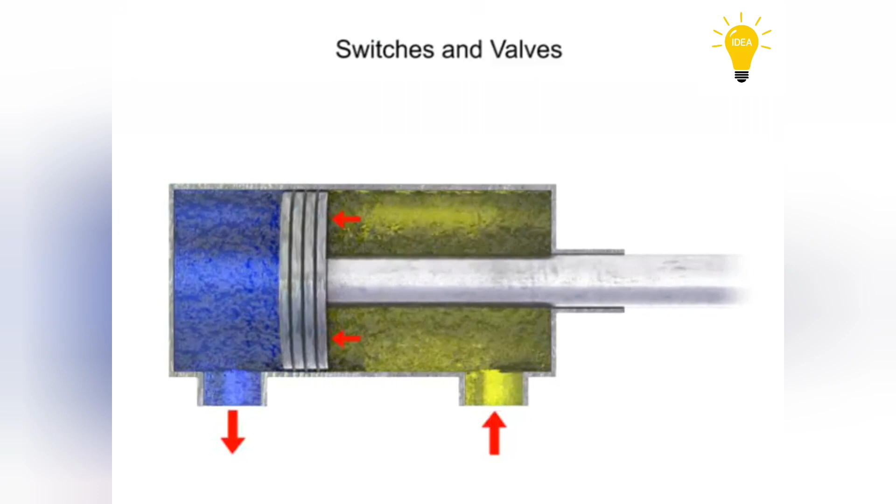Fluid valves are typically described as being either in the open or closed position. As described, the open position allows the flow of fluid, while the closed position prevents flow.

The normal position of the valve is defined as the position of the valve when its spool is unshifted and the power is off. This means that any mechanical actuators, such as springs, are in their non-actuated positions. Electrical actuators, such as solenoids, are powered off. The normal position can sometimes be referred to as the unshifted, de-energized, or unactuated position.

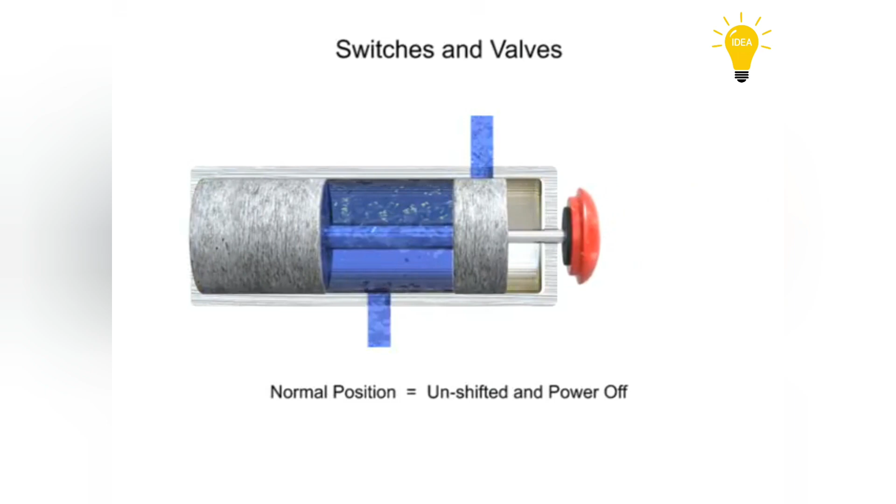Valves that do not have mechanical or electrical actuators do not have a normal position because they must be manually moved. When shifted, they remain in that state until manually shifted to another position.

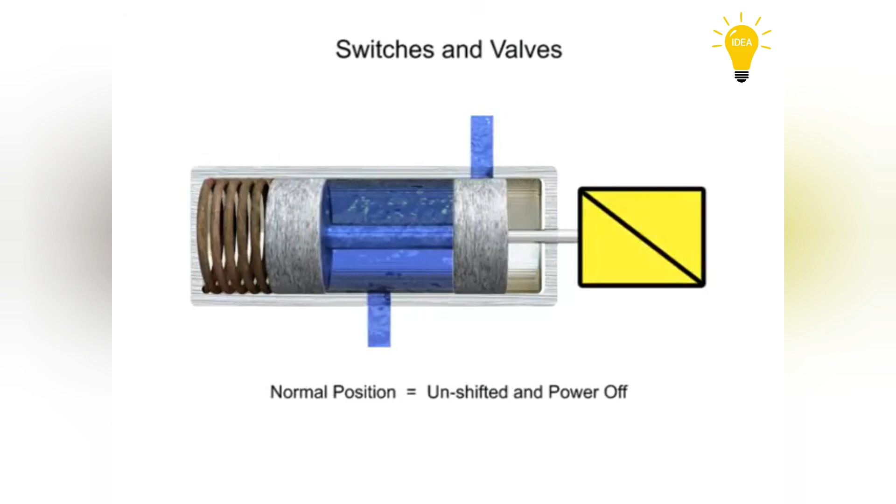The terms normally opened and normally closed are used to describe the condition of a valve when it is in the normal position. For this valve, the normal position allows unrestricted fluid flow through the open ports. Therefore, this valve is a normally open valve.

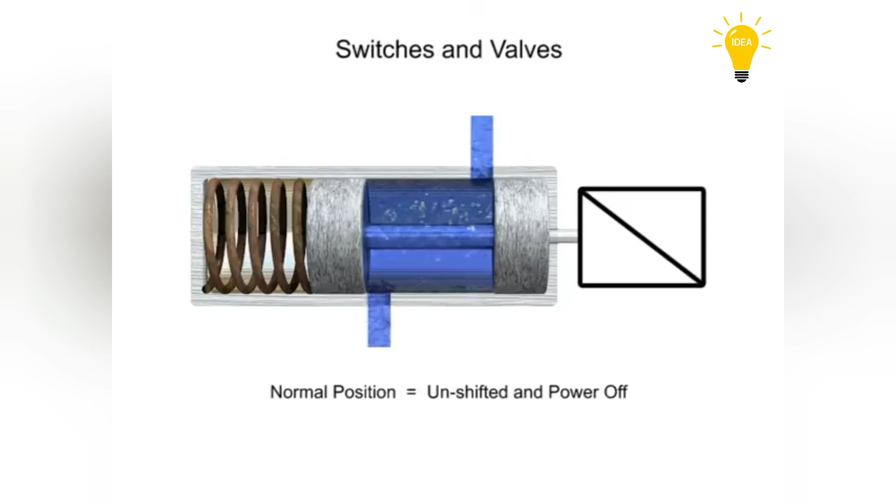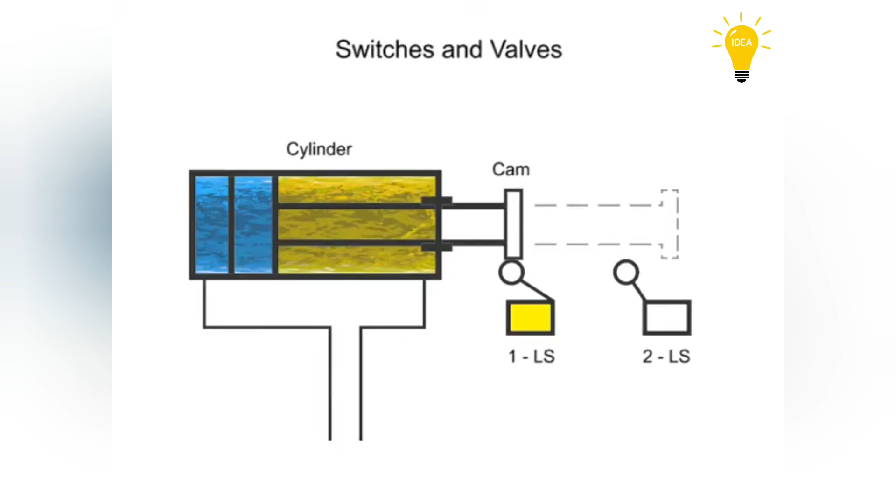As with fluid valves, electrical switches also have a normal state. In this case, the limit switch is operated by the movement of the cylinder rod. When the cylinder rod extends, it moves a cam which makes contact with a lever that actuates the appropriate switch.

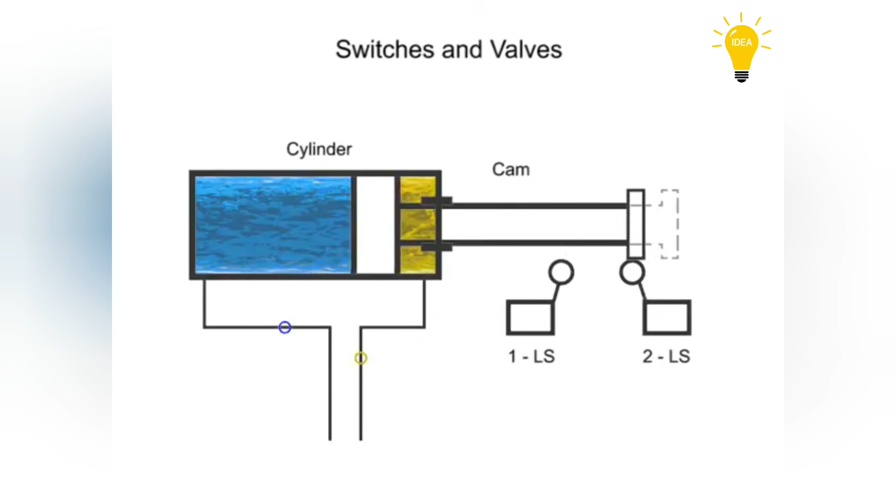The limit switch regulates the electrical circuit that controls the cylinder. Wiring diagram graphic symbols for limit switches are used to identify both its location within the electrical circuit and the state of the switch contacts.

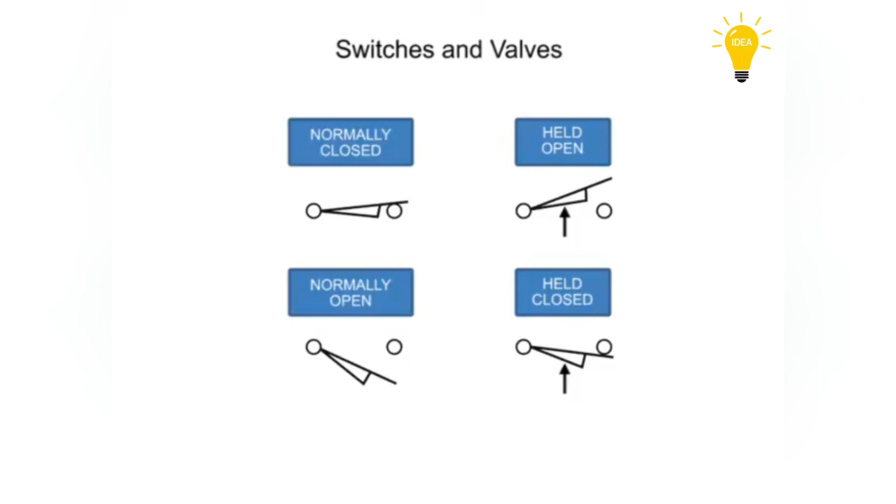The most common contact symbols show whether the switch is normally open or normally closed. As before, a switch is considered to be in its normal state when it is unshifted with the power off. While a normally open valve allows fluid to flow, a normally open switch prevents current from flowing. Electrical current can flow across the switch as long as both sides are touching contactors.

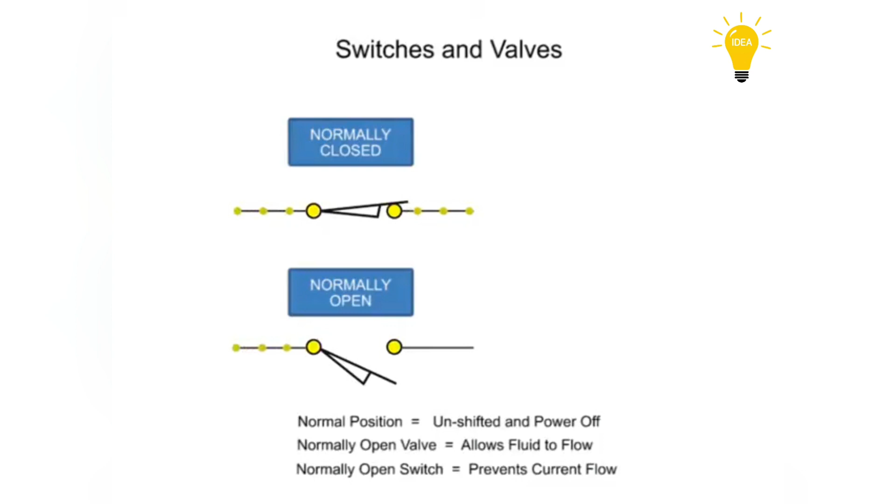Circuit diagrams are typically depicted in their normal off state before any work has been accomplished and no cycles have started. If the switch is drawn above the circuit line, it is a normally closed switch. If the switch is drawn below the line, it is normally open. Adding an arrow to either illustration indicates that the switch can be held open or closed.

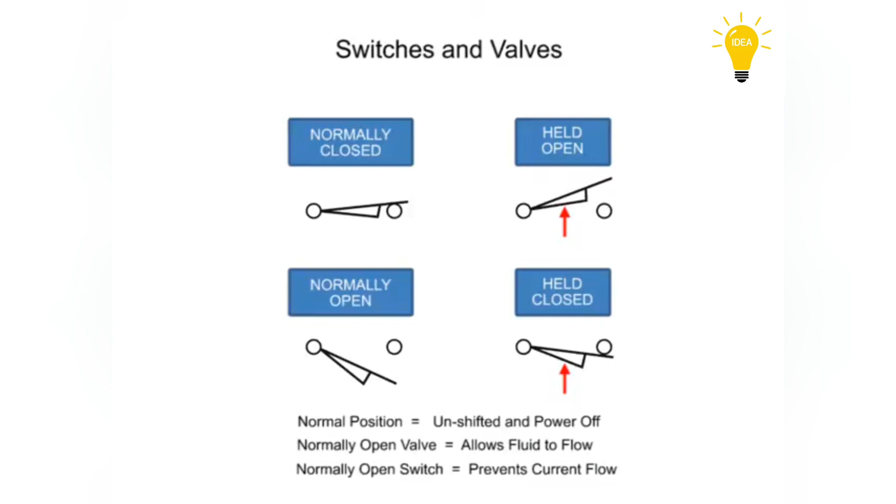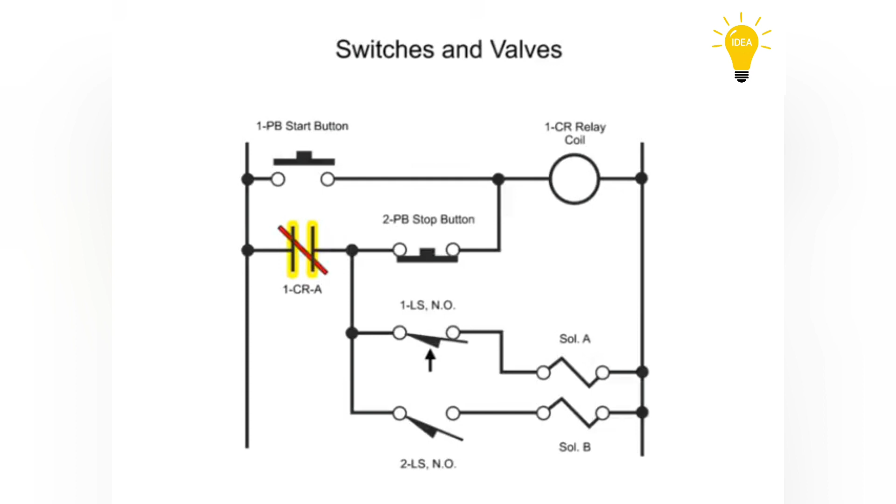The contacts are depicted as normally open. As with switches, they can also be manufactured as normally closed, with a slash mark depicting the normally closed state. This particular circuit illustrates the electrical relationship between limit switch 1 and 2 and solenoids A and B.

When the start button is momentarily pressed, relay coil 1CR becomes energized, allowing contacts 1CRA to be closed and connected. This allows the relay to hold a circuit through the stop button and contacts 1CRA. Once the contacts are closed and connected, the coil will remain energized even if the start button is released.

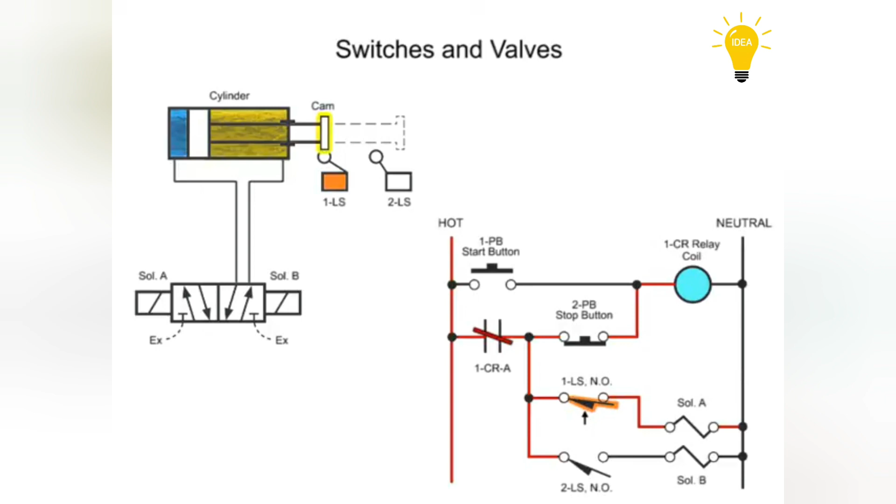When contacts 1CRA are closed, electrical power is distributed to the rest of the circuit. Since limit switch 1LS is held closed by the cam prior to the beginning of the cycle, current flows through this switch and activates solenoid A.

Since limit switch 2LS is open prior to the beginning of the cycle, current cannot flow, and thus solenoid B remains de-energized.

Solenoid A operates the hydraulic valve, which shifts to allow fluid to flow and extend the cylinder. As the cylinder extends, the cam releases limit switch 1LS, which in turn de-energizes solenoid A. However, since the valve has no spring returns, it remains in its shifted position when both solenoids are de-energized.

As the cylinder continues to extend, the cam engages limit switch 2LS. When limit switch 2LS is closed, solenoid B becomes energized.

Solenoid B then shifts the hydraulic valve, allowing fluid to drain from the blind end and begin to fill the rod end of the cylinder. The rod and cam begin to retract until the cam engages limit switch 1LS and the cycle starts anew.

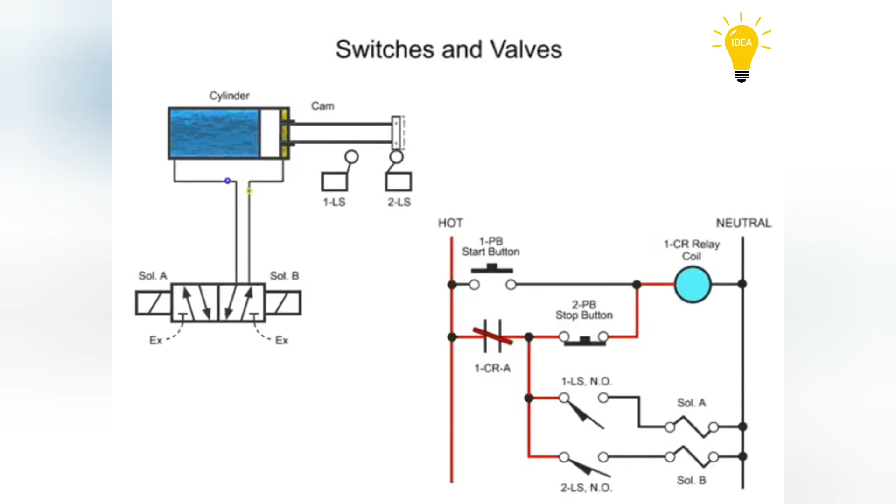When the stop button is pressed, the relay coil becomes de-energized and relay contacts 1CRA open, disconnecting the circuit. This removes current from the entire circuit and de-energizes both solenoids. With both solenoids de-energized, the hydraulic valve remains in its current position and the cylinder will continue to travel in its current direction until it reaches the end of its stroke.

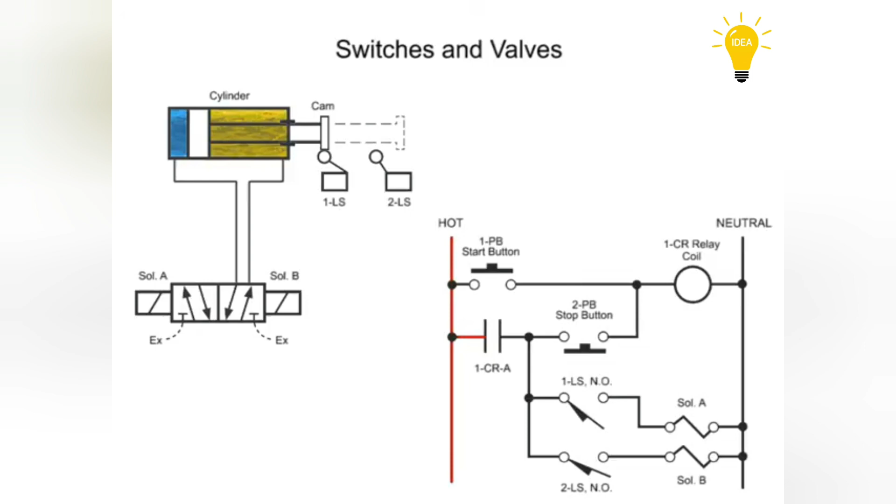Since there is no power to the limit switches to engage the solenoids of the valve, the cylinder remains in its current position. Depending upon when the stop button is pushed, the cylinder may stop in either its extended or retracted position.

Understanding how electrical circuits impact fluid machine components can help designers and technicians develop the most effective systems for each unique requirement.